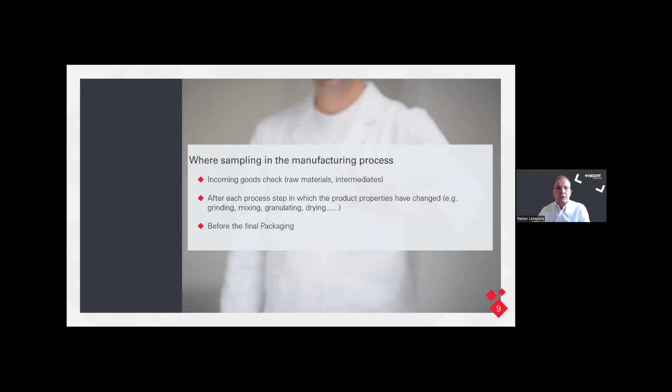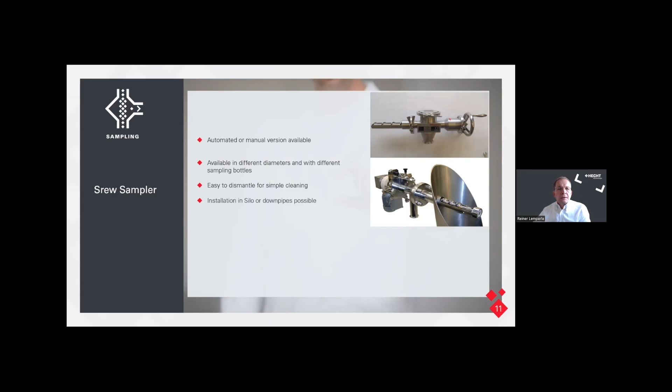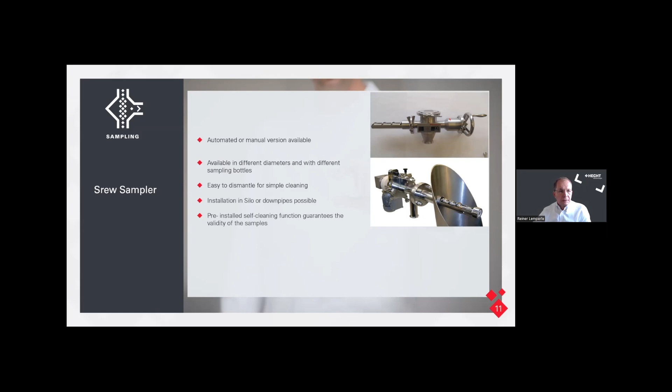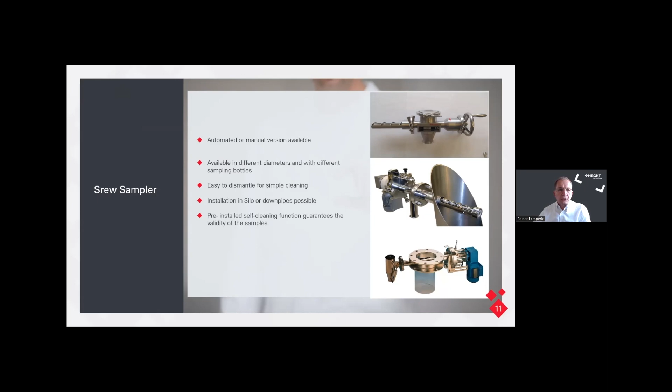Normally, the systems are installed either in silos or downpipes, so that the product falls through the screw and the screw can collect the product. We have a pre-installed self-cleaning function, so that at any time it's guaranteed that you will get good samples which give you a good impression of what kind of product you have in the process. The last picture you see here is a special design where the screw is inside two flanges, and the collection is on the other side of the motor drive.

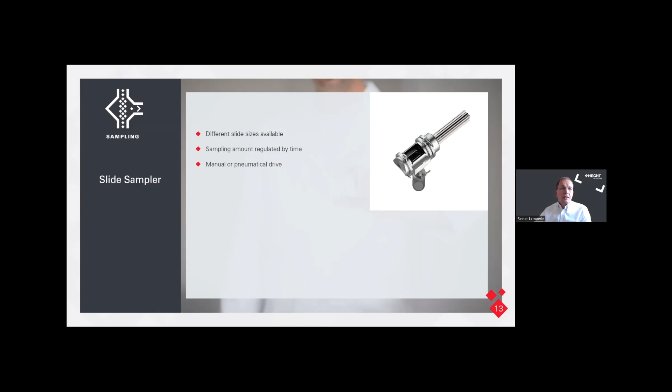Next is a slide sampler, which is quite a nice unit. You see here the chamber sample, and I will show in a few seconds how it works. It's a slide. The slides are also available in different sizes, corresponding to what sampling amount or product size you have. The sampling amount, how much material you collect in the bottle underneath, depends on how often you open and close the system. It's again manual or automatic, in this case pneumatically driven. You can easily integrate that into existing systems.

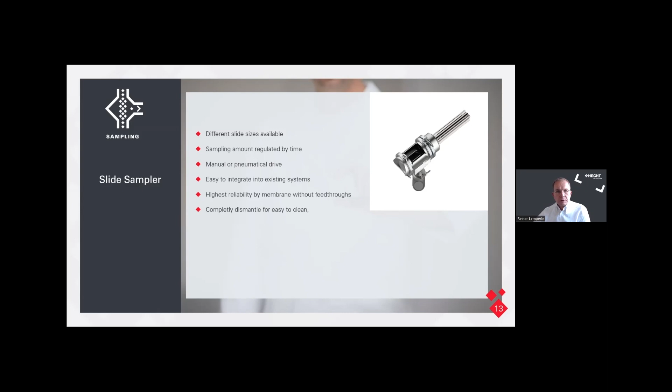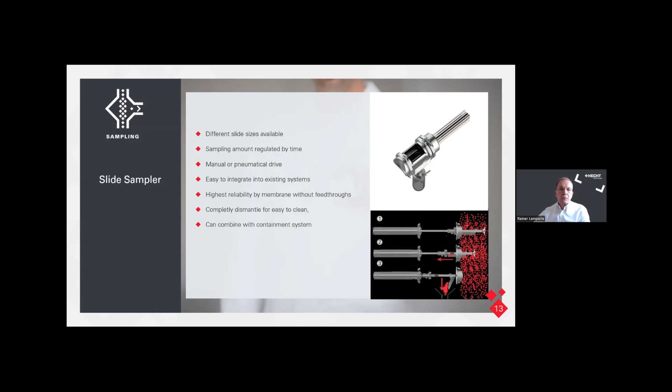So when you have an existing unit and come to the conclusion that you need a sampler, you can easily adapt the system. It's again easy to clean, easy to handle and dismantle. So from a cost point of view, or even if you have different products, you can use it for this. In this picture you see the different steps: in the first slide, it's in the product flow, and it collects particles, powders here on the slide. After that, it moves into the chamber in this area, and then automatically it's swiveled down and the sample falls through the chute into the sampling bottle.

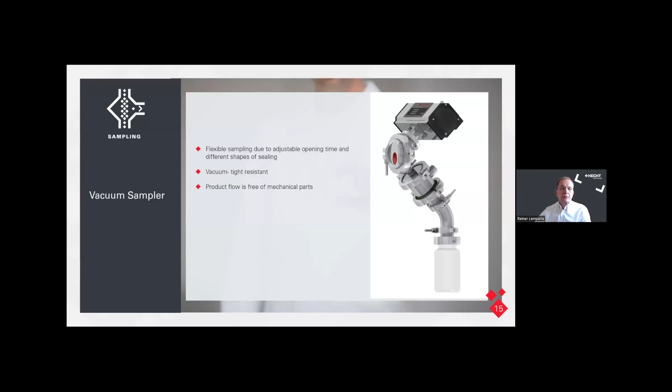Next solution I will show you is our vacuum sampler. It's quite a system which looks a little complicated, but its design is quite nice, because you have free flow and no mechanical parts inside the sampler. It's again easy to clean, and here on this photo you see the product will be sucked in due to vacuum, which you have to bring in, and if you have vacuum anyway somewhere in the process, you can connect. There's a vacuum pump, and then you suck in via a filter, a ring filter here, the samples into the system.

We have a dead-space-free design, so again quite nice to clean. Normally such systems are used when you have process equipment and install it somewhere there to take the samples out of the equipment.

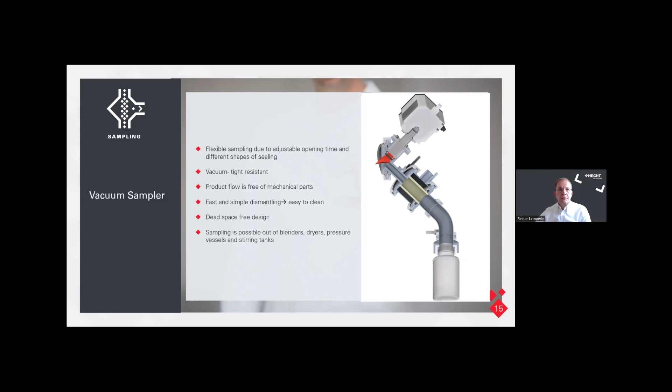A few examples in the next slides about products which correspond to the different OEB levels. The OEB1 level is low risk, and a product which can be classified in this OEB1 level is ascorbic acid, a quite well known product.

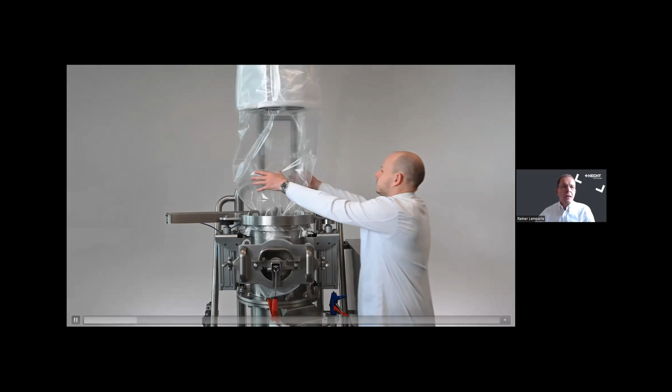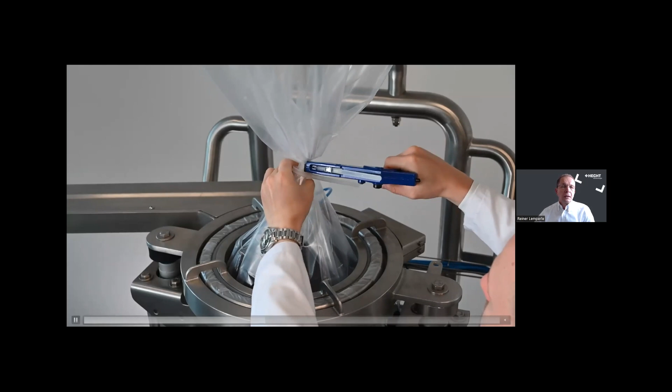Here you will see my colleague who will use these containment clips. He will insert it into this small device and then use this kind of strapping pistol to close the stripes and cut it after it's closed completely. It's important that the distance between the two stripes is rather zero.

It's of course not zero, but nearly, so that after he cuts, in between the two stripes there is no PE foil looking out of that. And then you have two closed systems. So this is the system our containment solution always works with.

And now in the second video, I will show you our containment sampling stick. Here again we will use this technology in a different way, because in the video it's shown with another solution, but in principle it's the same.

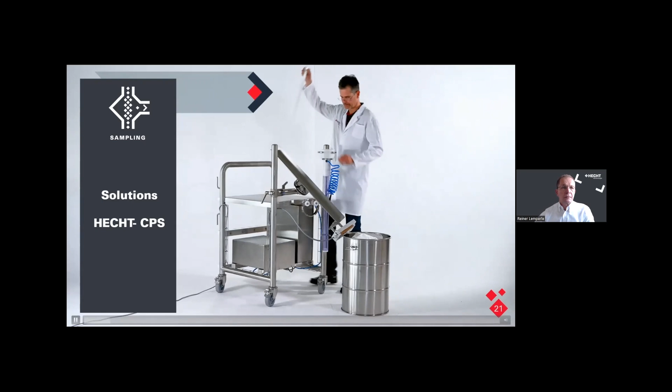Here you can see the sampling unit. To complete the sampling unit is the first step. The containment sampling stick will be inserted into this device.

On the top here we have a PE foil which has glue on it. The stick will then be put onto a product, which in this case is a PE liner inside the drum. We have a small vacuum pump to be sure that it is glued in a sufficient and tight way.

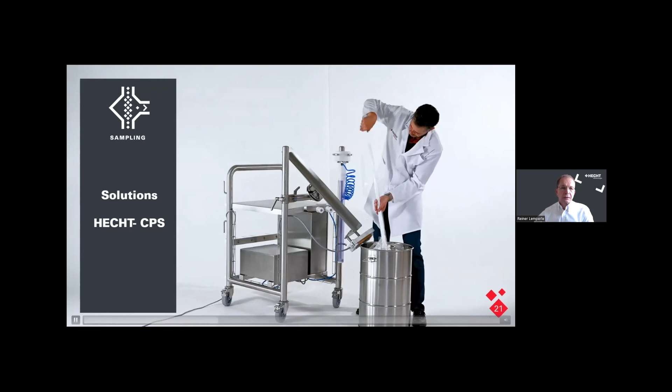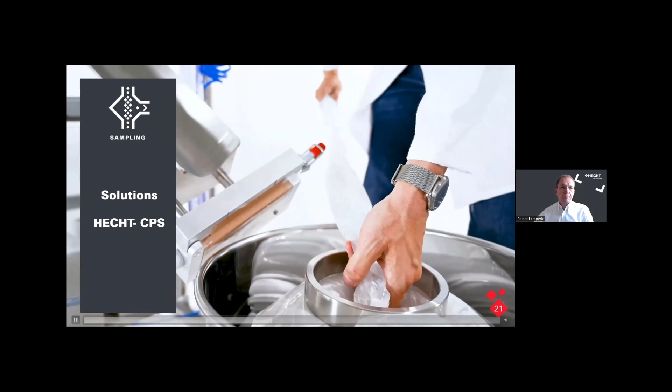After this is fixed to the product, the operator pushes the stick inside the product, takes the sample, and pulls it out again - then the sample is here inside.

In this case, as mentioned before, we will use a welding bar which makes two welds and cuts the foil, so that on one hand you have a rest which closes the liner inside the drum, and also closes the sampling stick with the sample.

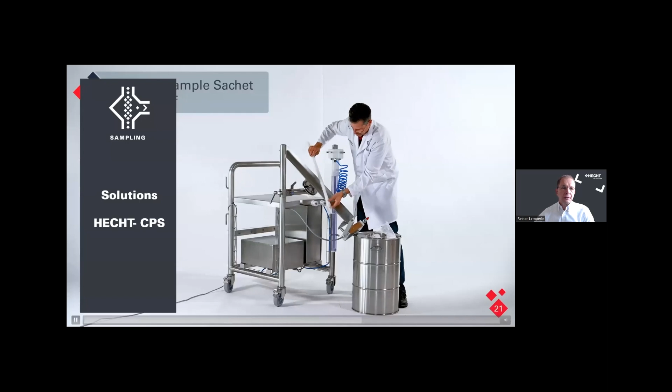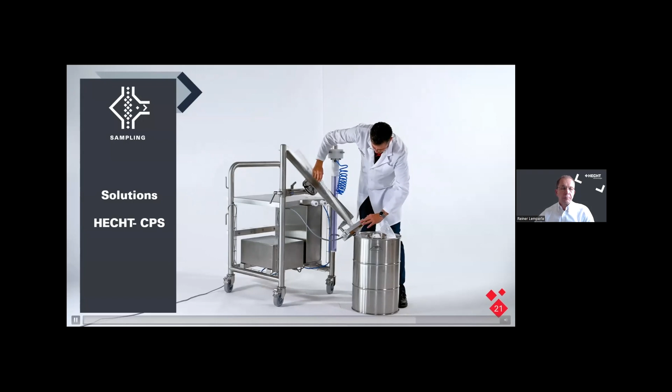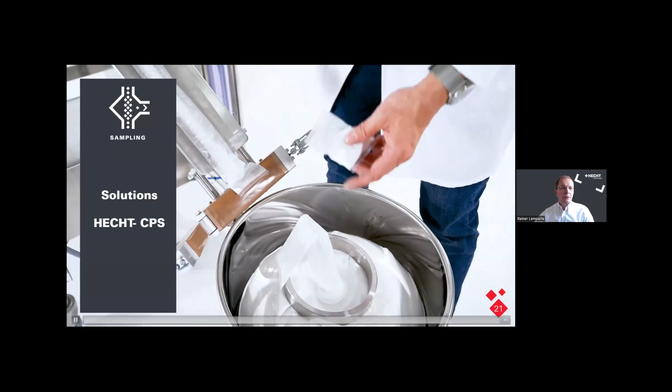Then the sample is collected at the end of the PE liner. With a second weld and cut procedure, we receive the sample on one side, and on the other side we again close the contaminated sampling stick, which is a disposable unit you cannot use a second time. Then you have a nice sample which you can bring to the quality department.

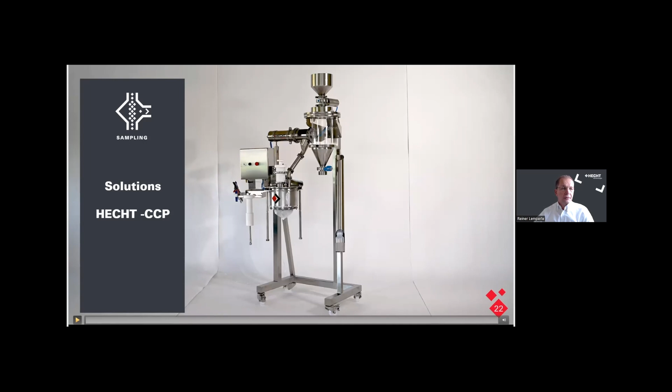Next example - here you will see the solution where we again use our containment clip. It's a so-called containment sampling port. A nice idea here is that you can use a standard sampler, as I showed before, and adapt this containment device so that you can take out the sampling bottles in a contained way.

I hope the video works again.

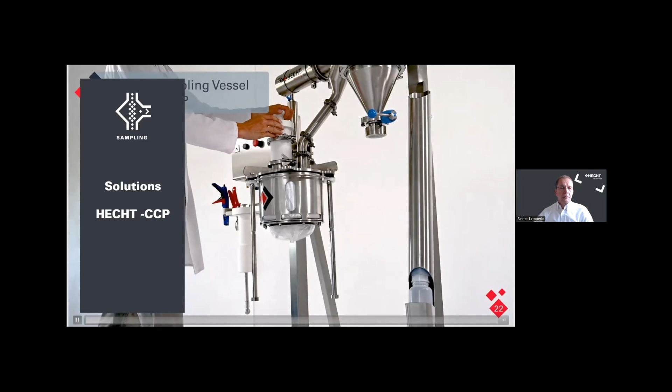In the first step, you push a bottle inside this device. We have a PE foil underneath it. We open the bottle and connect it to the product flow of the sampler.

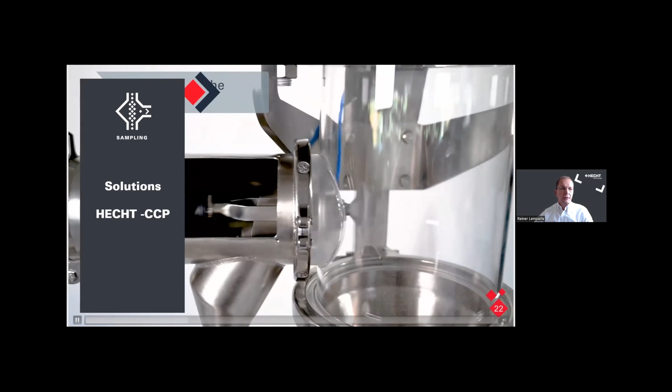Everything is always, as you see here, in a closed, contained way. Here you will see our slide sampler again - we collect the samples and bring them into the sampling bottle.

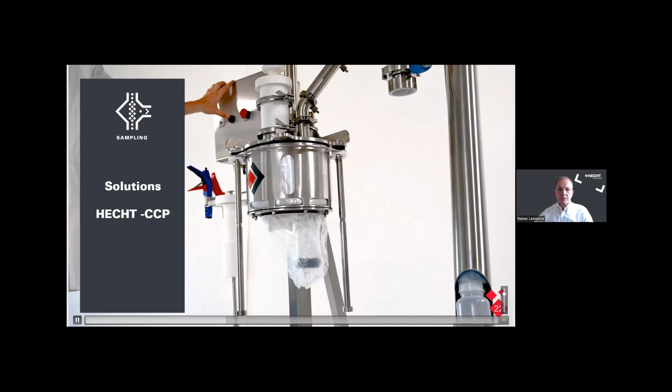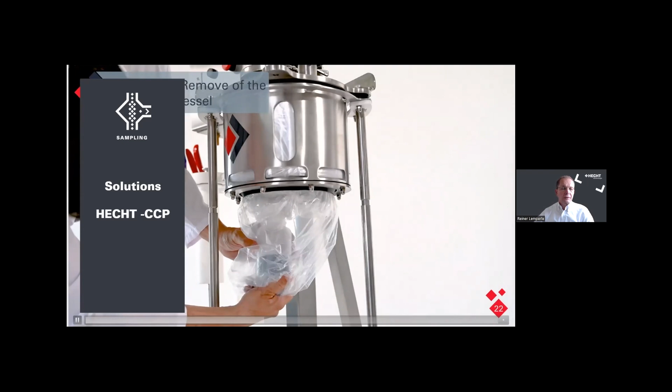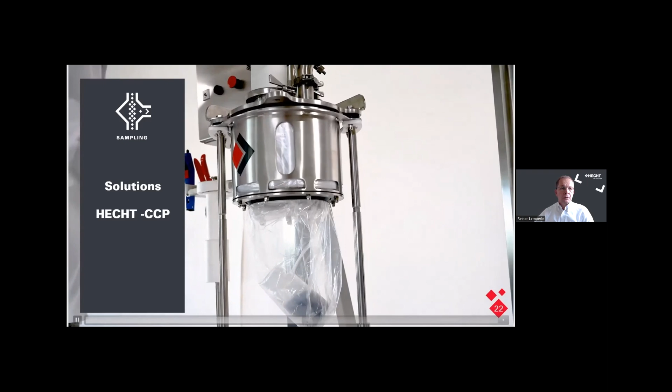Sorry - sampling bottle. You can do that as often as you want, as much product as you want to collect. After finishing the sampling step, you close the bottle again, and then use our stripes to seal on one side this PE foil-covered sampling bottle.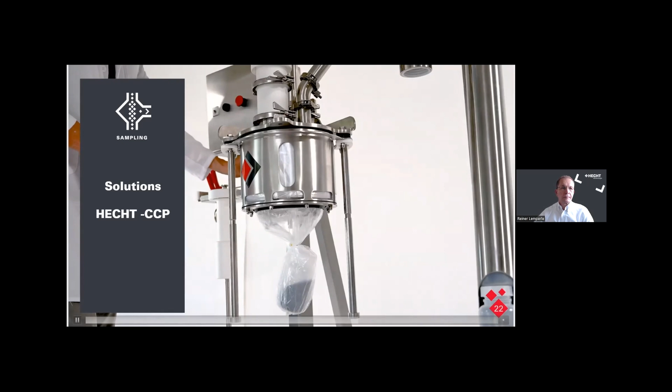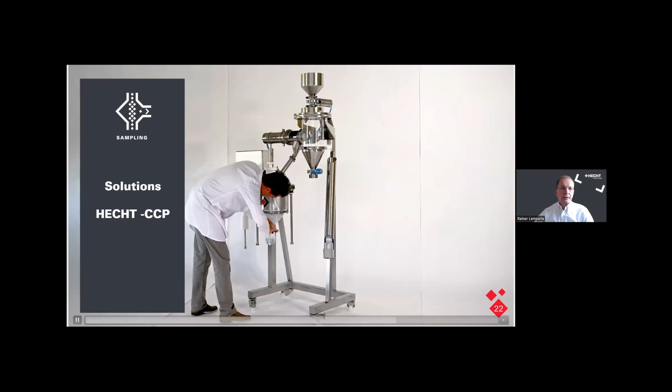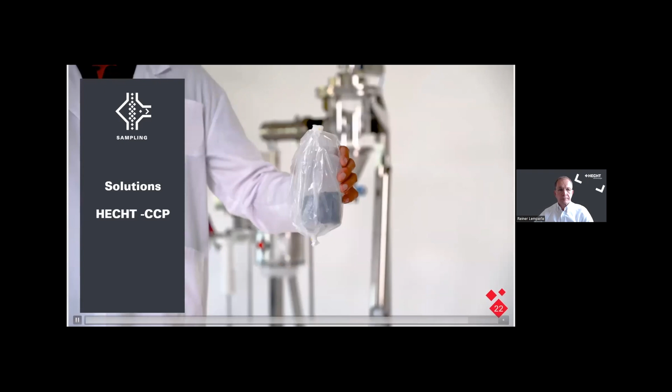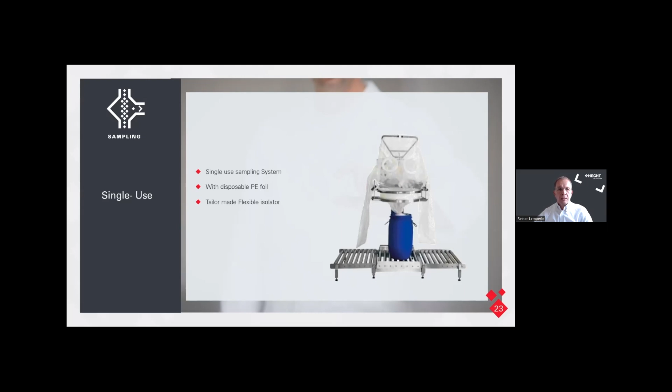This video is a slightly older version where we have two separate clips, not with a connected connection or binder in between, but the principle is the same. Finally, cut in between, so you have a tight sample port, and on the other hand, tight and covered contained sampling. Last but not least, a single-use solution where we have a flexible isolator with gloves to take samples in an isolated way. It's not often used, but I want to show it as a final option. These flexible isolators can be made tailor-made to the requests from the product or from customers' ideas. Thank you for your attention, and I'm now available for questions.

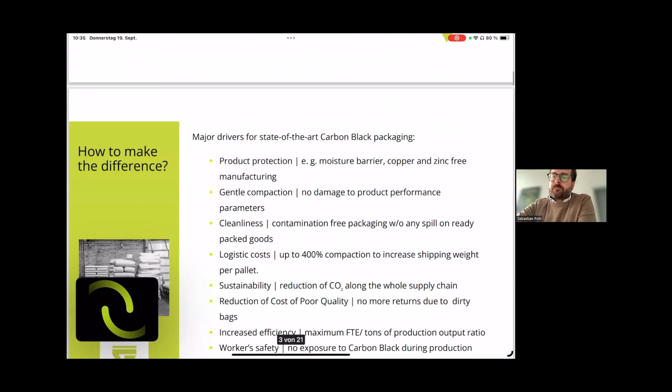Talking to our clients, Carbon Black is a nice example, but wherever we go out and talk to our clients and ask them what their project goals are, we will be challenged by one or more of the targets you can see here.

The clients are asking us for product protection. It's very important that during the filling process the product does not get in touch with any copper or zinc, and that once the product is in the bag, there's a really good moisture barrier, because of the storage and logistics process.

Customers are looking for gentle compaction. So when we talk about ultralight powder filling, we talk about using vacuum for the products to be filled into the bag. It's very important for the clients that we do not damage the product performance parameters with the filling technology we are using. You will learn a little bit later how Birla really was asking us to do this.

Cleanliness is a very important topic. The clients are asking us to get a very clean result, to make sure that there's no spill and contamination in the production plant, but also in the whole logistic process, that the product stays inside the bags, and when the pallets are being transported, that there's no spill on the way.

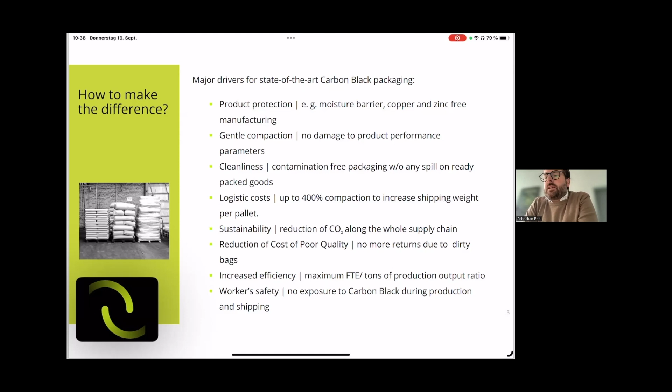Last but not least, another topic important not only for our Carbon Black customers but for every customer in the chemical industry: nobody wants the workers to be exposed to the product. This is where the loop closes again and where cleanliness comes up. If there's no spill, no contamination, there's also a very safe work environment where no worker in the factory, at the client, or during logistics is exposed to the product, which is supposed to stay inside the bag.

How do you achieve the best possible results? Like I said in the very beginning, packaging is always a matter of different factors being adjusted to each other. What we call the clean cycle of packaging always involves the product of our clients, our bagging system, and the containers—in this case the sacks—where we bring the product with the machine into. Only if you manage to really align those three different factors will you reach the optimum, the best result in clean and efficient filling.

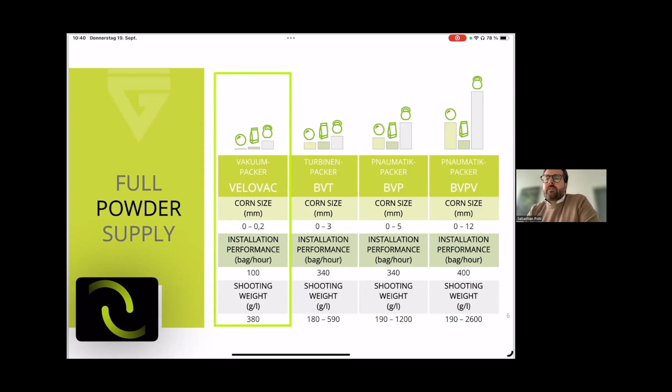The first step, whenever we talk to a client, is asking for some specific parameters of the product in order to determine which of the different technologies we have available would be best to meet the customer requirements. If we talk about fluffy carbon black, the kind used in the battery industry, we would easily pick the vacuum technology, our Velovac, as the bulk weight is way below 100 grams per liter.

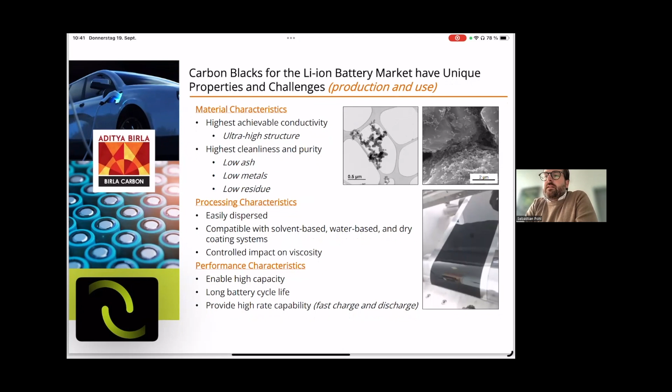Being approached by Birla Carbon some years ago, they were asking us for a solution for their conductive battery materials. For Birla, it was very important that they have some specific material characteristics which they really wanted to protect—it's a very high structure, and a very pure product they are producing. They were asking us to build a system which during the filling process does not damage this structure, and which allows the product to be easily dispersed in the further process.

So by using vacuum technology, it was very important for them not only to get a clean filling process, but to get a bag which is easy to handle afterwards. For Birla, the major thing here was that they wanted to keep their material characteristics intact using their new filling technology. Why is it important?

It's important because those characteristics of the material itself have a huge impact on the later product made by Birla's customers. It has a big impact on the capacity of the batteries, on the life of the batteries, and also how fast you can charge a battery and how long it will last before discharging.

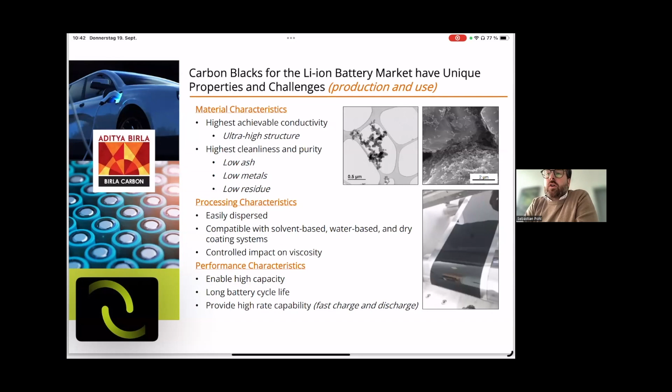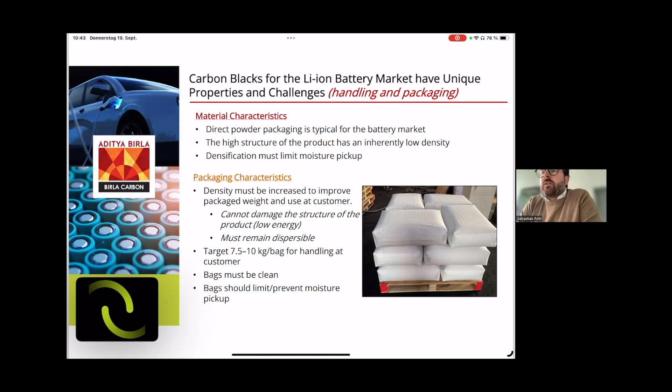Last but not least, those products are shipped all around the world. So during the logistics process, you really want to prevent moisture from being picked up by the product inside the bag.

Knowing that the clean cycle of packaging is key to the best results you can achieve, we teamed up with Dy-Pack Packaging, a paper bag company, to create our own joint brand for paper bags used in vacuum bagging applications. The SafeDuVac bags are tailor-made to be vacuum bagged and to provide the best-in-class, best-in-industry parameters to clients.

As you can see on this slide, not all clients in the market ask for the highest, most sophisticated moisture protection solution. There are also clients, for example in the fiber industry, where it's more important to be on the sustainable side, to have paper-only solutions, and a very lightweight paper sack.

So therefore, we created the SafeDuVac product line, which consists of 3 different paper bags. As you can see, they are custom made and suited to the different requirements of our clients in different industries. In this Birla case, we ended up with the SafeDuVac professional bag, because for the carbon black business, they really wanted the highest level of moisture protection, the highest level of bag strength, and also already moving in the direction of dangerous goods bags.

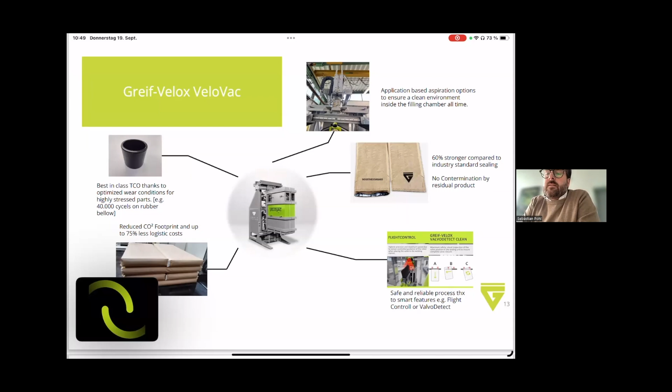Looking at the ready filled bags on the pallet in the bottom left of this slide, you can see how nicely shaped and slim those bags are that we are filling here. This is how we can really achieve a big reduction in logistic costs and make an impact on the CO2 footprint of our clients.

Okay, looking at the case at Birla Carbon - how did it work out? Of course this is a process, and if you want to bring the clean cycle of packaging together, bringing the three factors in order - the paper bag, the product, and the machine - this is a process with more than one step. When Birla first approached us, they told us they had the goal of a new packaging line, wanted it really compact, tailor-made for their pallet size, and wanted to look into the compaction we could do without damaging their product.

We said okay, we brought Dy-Pack to the table, and we engineered a system together which might work from our point of view. Around one year later, we did initial product trials - Birla sent product to our facility here in Lübeck, Germany. Dy-Pack built SafeDuVac bags, and we came together to do bagging trials to find out how the Birla product acts with our machine technology, how it acts with the SafeDuVac bags, and how much compaction we can add to the product without damaging it.

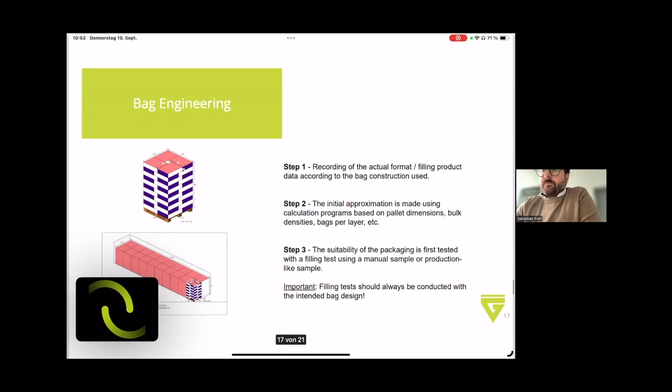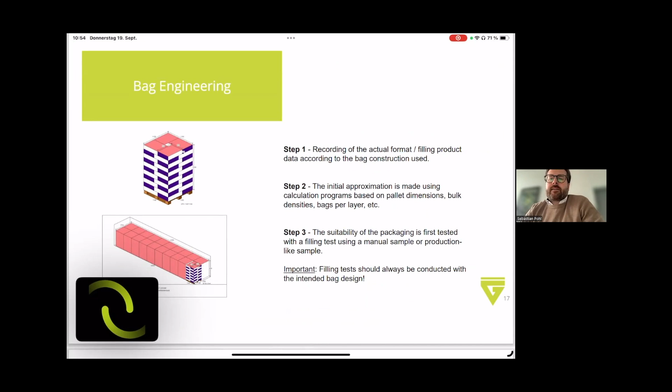As part of the bag engineering, based on the parameters we gathered during the initial trials at our facility in Lübeck, we could calculate the best volume of the bags, the best height, the best width, in order to get the optimum fit for the pallet and to find out what's the optimum for getting bags into one overseas container.

Another benefit of the confirmation trials on site was that we could already get the people at the Birla facility familiar with the equipment, which was supposed to come about 6 months later. Not only the people, but also our service people, were able to get familiar with the facility and the process equipment in front of our packaging line. So all the data we gathered is now very important information for us to get a very smooth commissioning phase of the system, because we already know the important parameters which we have to set on the machine.

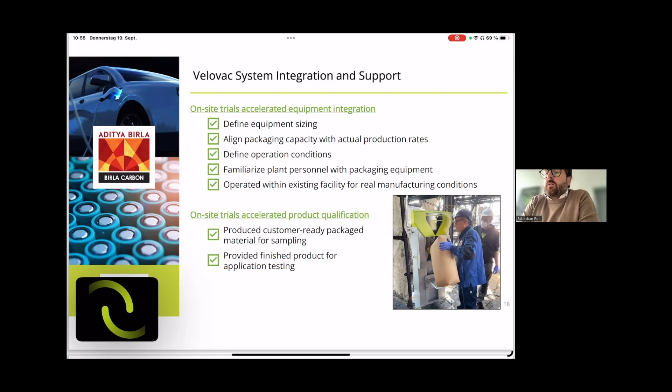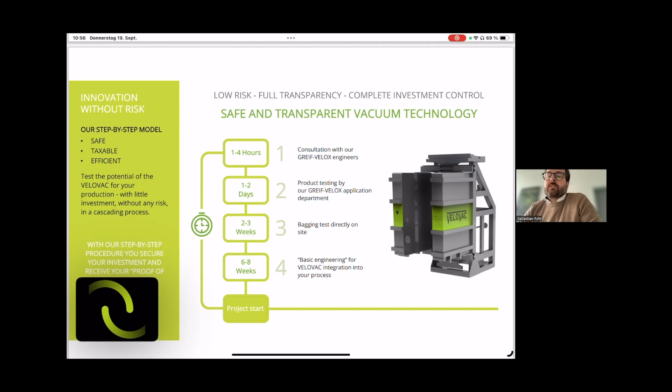So what my offer to you is that we can do this also for each and every other customer, because the process of getting there - from an idea to reduce costs, to increase cleanliness and improve the process, to having a ready installed system on your facility - is like a standard process for us. Getting together, discussing the goals of the project, defining the scope of a basic engineering, defining the scope of a trial, conducting trials, and taking it from there to really design a tailor-made concept along the clean cycle of packaging is our standard process when we develop such systems together with our clients.

Thank you very much. Questions?

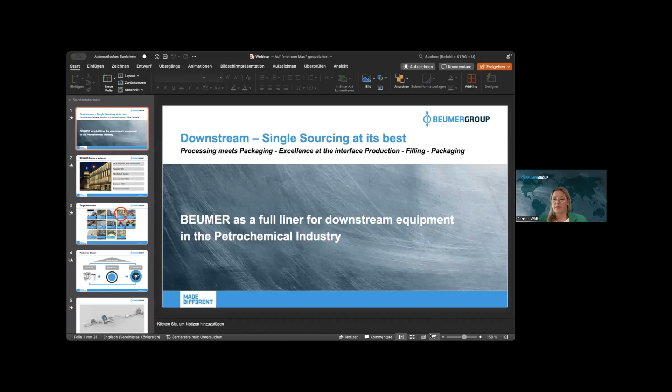Yeah, thank you, Clara, and thank you for introducing the talk. I hope you can see my screen. Yes, it's working, perfect. I would like to talk to you about BEUMER as a full liner for downstream equipment in the petrochemical industry.

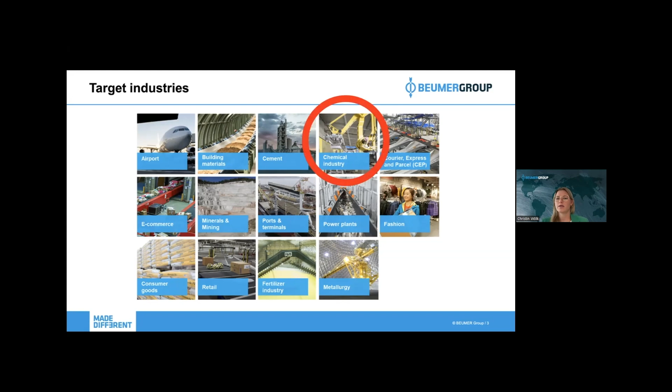At first, maybe we could have a glance at BEUMER, the BEUMER Group. It is a 100% independent family-owned company, founded in 1935. We have our headquarters in North Rhine-Westphalia, in a town called Beckum, Germany. In recent years, we grew very much, so right now globally we have 5,600 employees total in 40 subsidiaries worldwide. The BEUMER Group has a lot of target industries. We focus on not only the topic I will talk about today - just to give you an overview, you can see all the industries we provide technologies for. But today, as already mentioned, I would like to focus on the chemical industry.

We strive to be the partner of choice by providing new systems, modern solutions for the filling, palletizing, and packaging industry to our customers, by generating digital solutions as an add-on to our machinery for data analysis, preventive interactions, and planning, and our outstanding customer support, where we accompany our customers' machines to reach the longest life cycle possible.

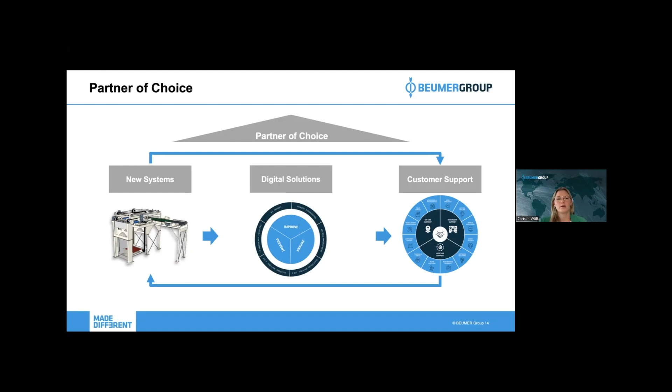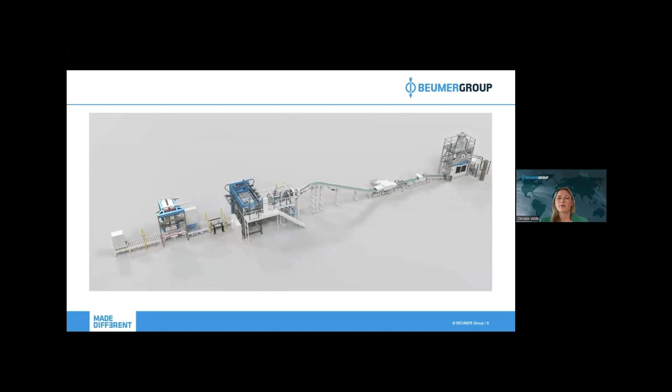The process looks like this. At first, of course, we have the granulates in a silo from the customer, where we or the customer wants to bag this product into polyethylene bags. Then we have bag transport, then palletizing the bags onto empty pallets, and at last the packaging process, where we put a waterproof or transport-proof package on top of the stack.

Here you can also see the equipment BEUMER has for this process. We will dig into each machine in the next minutes. We have the BEUMER fillpac FFS as a bagging machine, the bag transport, which can contain check weighers, metal detectors, bag discharge units, or any kind of bag printers and labelers. Then the BEUMER palletizer, which could be a paletpac or a robotpac. One is a high-rack palletizer, and the other is a robot arm palletizing any kind of goods. Last but not least, we have the BEUMER stretch hood at the end of the line for packaging.

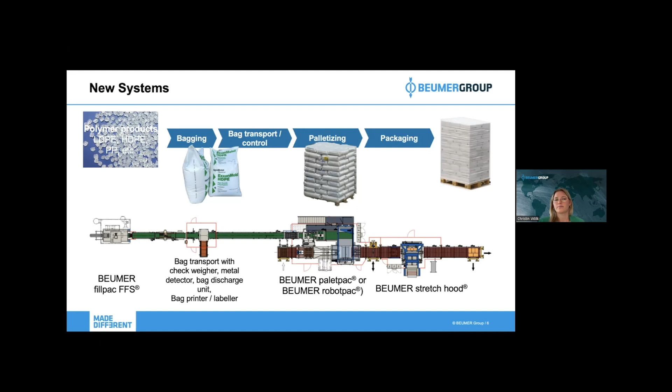This is our BEUMER fillpac FFS bagging machine. It forms, fills, and seals the bag in one machine, a very compact, flexible, space-saving design. It is robust, has low vibration technology, and can speed up to 2,600 bags per hour. This is absolutely high capacity. Also, this machine is movable, so you can serve several silos from one customer with one machine.

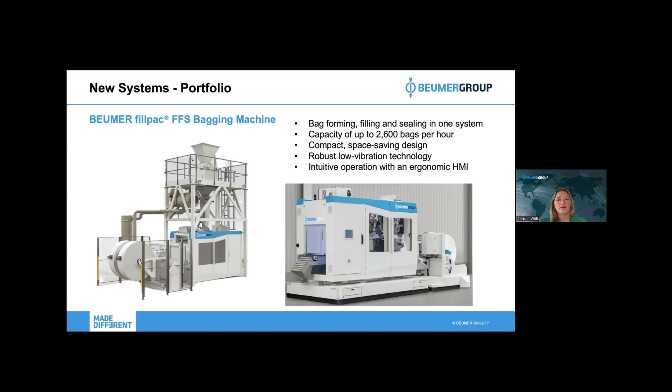If the capacity overall for both silos is not too high to invest in 2 machines, it can also be used for 2 silos.

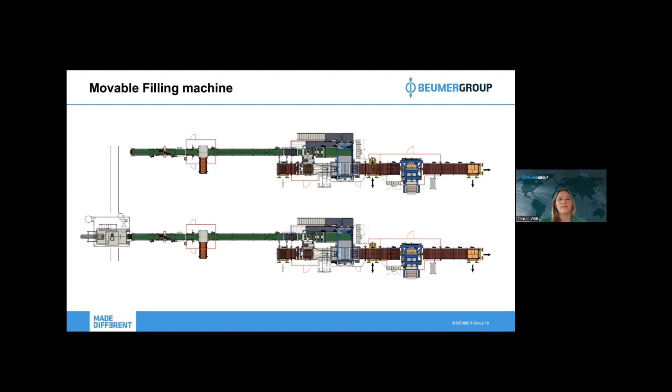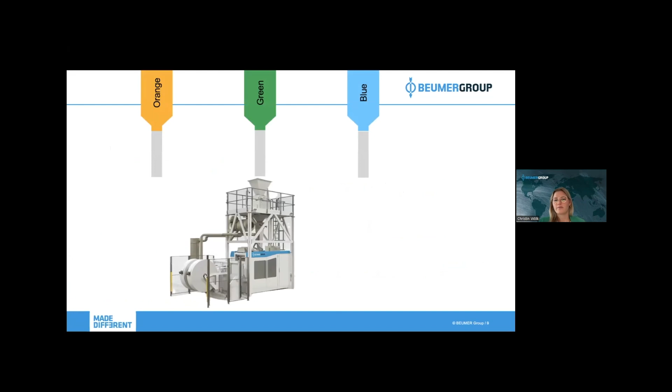For example, here you can see this machine is driving on rails. Here are shown 3 silos from the customer, and the FFS can be moved to each silo with an automatic docking system. The machine can be started automatically.

The next machine in our portfolio for this process would be the BEUMER robotpac Palletizer. It is outstanding in its compact design and interchangeable grippers, where you have a lot of possibilities, for example to grab bags, but also buckets, carton boxes, and any kind of goods. Also, the empty pallet can be taken by the gripper and placed onto the roller conveyor for further handling.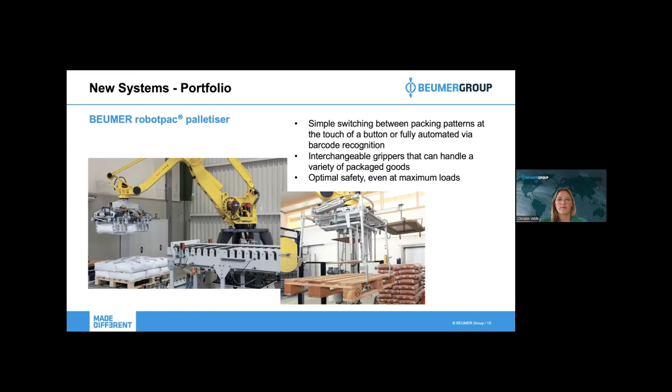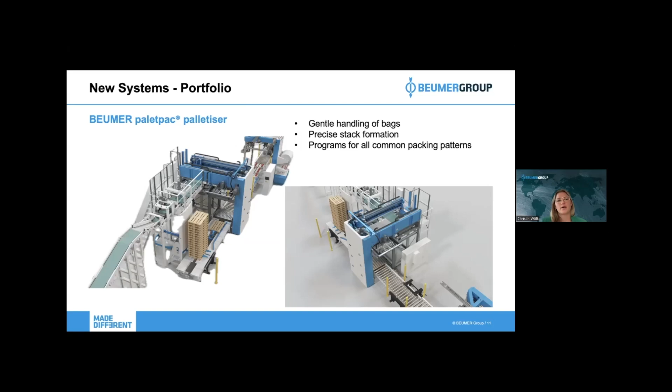Another palletizing solution from BEUMER would be the BEUMER paletpac, which is a high capacity solution, very precise in stack formation. You get the nicest stacks with this machine, and the bags are handled very gently by turning devices. There are a lot of programs that can be added for different layer stacking variations, and also for different pallet sizes at one machine. This paletpac focuses on palletizing bags only.

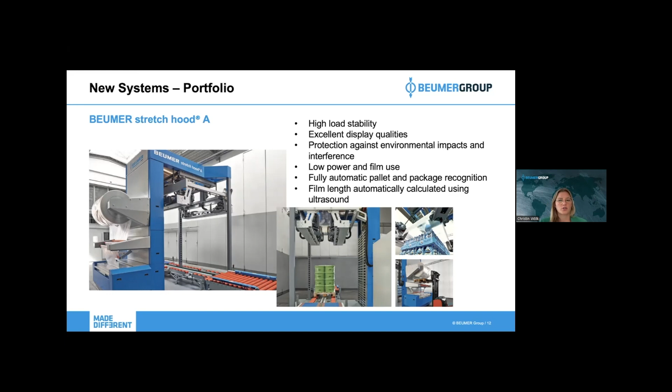The last machine in this process would be the BEUMER stretch hood, which is the packaging machine where we stretch the film. We do not need any kind of heat or other power like gas. This is a very sustainable machine with low power and film use, because we only have one film to put on top of a stack, and this film length is measured before the package arrives at the machine, and can be adjusted right before it is driven on top of the package. So no film is used for the bin.

With our digital solutions, we anticipate issues and act proactively to ensure continuous optimization of customer site performance. This means we focus on improvement to prevent any kind of issues on site and to ensure a running system for the customer. We do this with different solutions we have in our portfolio.

For example, the BG Insight, which I will tell you more about in the next minutes, and the Elara system, which is an intuitive mobile cloud software for the maintenance of the machines. It can be run on any device, like your mobile phone, tablet, or laptop, where the software, like an application, tells you when to maintain or change any parts. You can do it like a to-do chart, marking what is done, what is not done, or what has to be ordered next. So you have it all in one app.

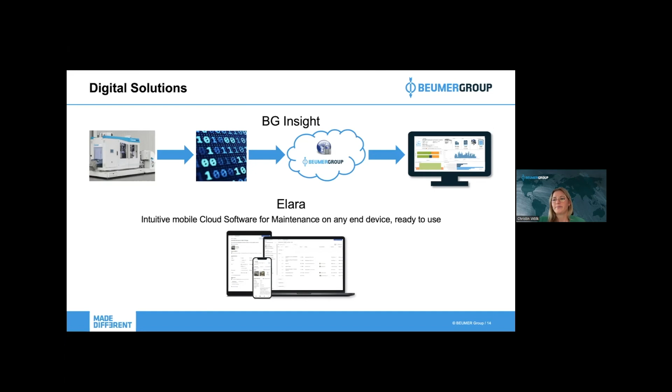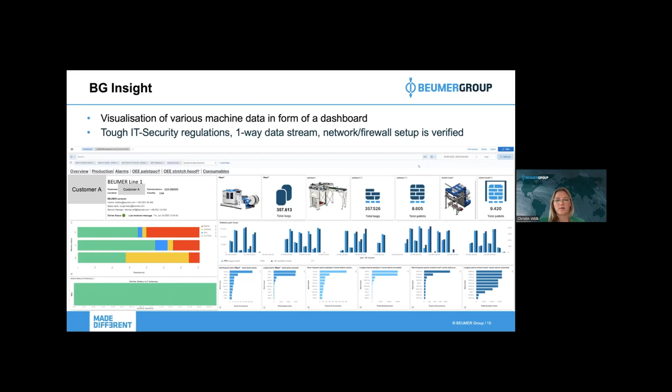Here's another example for a dashboard in BG Insight, where you can see again some analysis data, pallets per hour for the stretch hood, for example, and also total time machine status. Here you can see the red column is error time, yellow is the manual status, green automatic status, and so on. Also input output of the machine. So a lot of possibilities here.

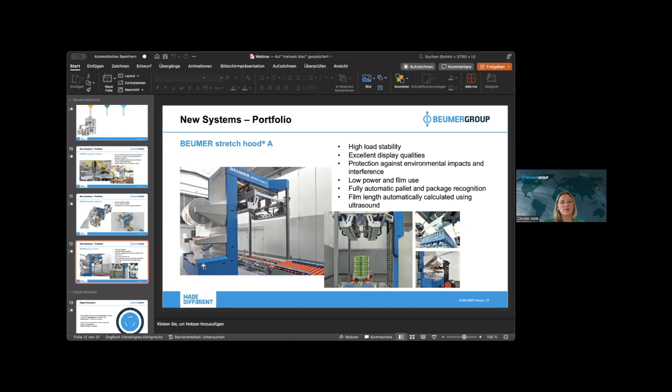Let me share my screen again and go back to the picture of the stretch hood. There you can see we focused on a maintenance concept where we can maintain everything standing on the floor, so we don't need a platform anymore. There are older machines from BEUMER as well as from other suppliers where you still have a platform on top, but with this machine you can reach the knife, the heating unit, the welding unit, and also move this frame down to floor level and do maintenance from there.